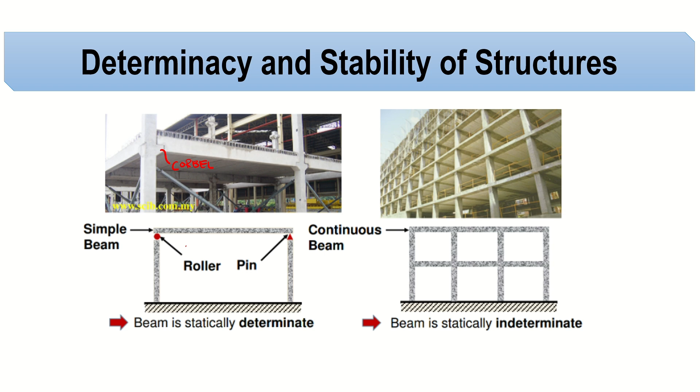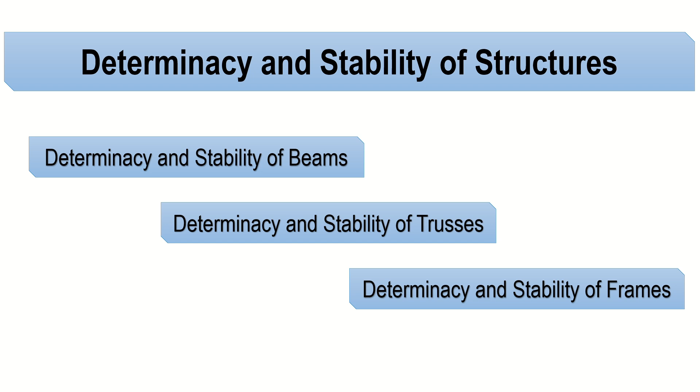Okay, so now determinacy and stability of structure can be divided into 3: determinacy and stability of beams, of trusses, and finally of frames. Each of them should contain different formulas, but the concept remains the same - the unknowns must be equivalent to the equations that you can generate.

Okay, so now before we start, let's review some of the concepts or support conditions that we need to consider if we are solving for determinacy, because the support conditions are known as the unknowns.

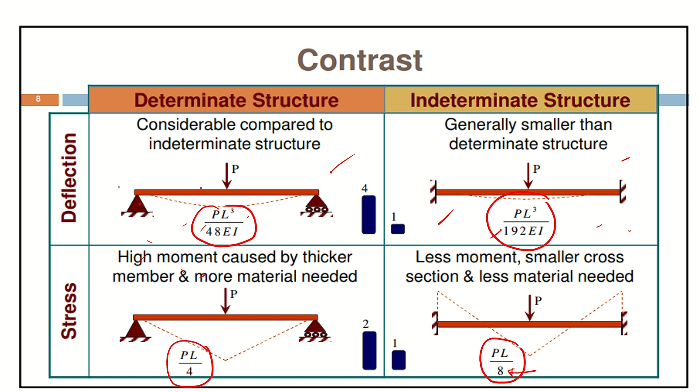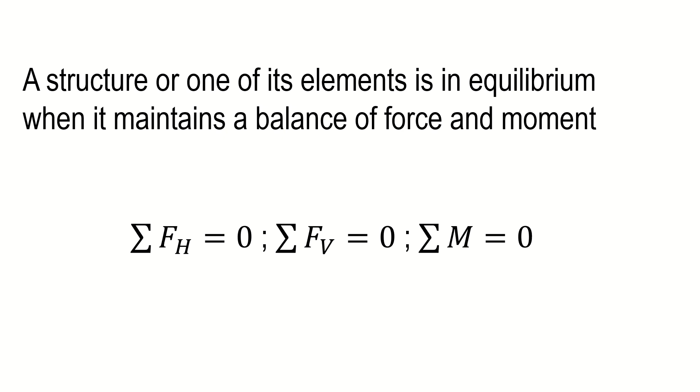A structure or one of its elements is in equilibrium when it maintains a balance of force and moment. We have 3 equations of equilibrium that can be produced for each structure. If we can solve it using those 3 equations, that is statically determinate. Determinacy: when all forces in the structure can be determined from the equilibrium equations, the structure is statically determinate. A structure having more unknown forces than available equilibrium equations is called statically indeterminate — as we discussed earlier.

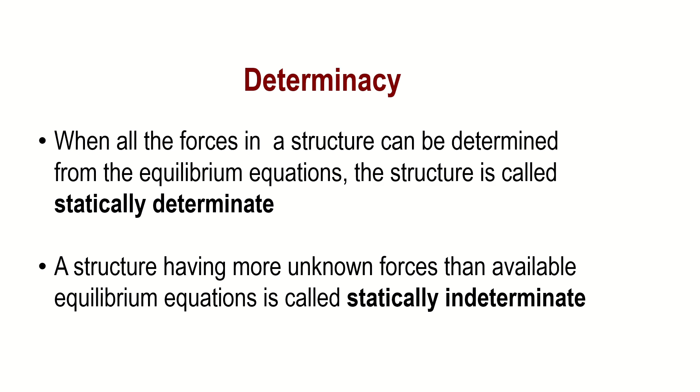Now let's check for determinacy and stability of a structure. First, count the total number of support reactions — those are your unknowns. Second, count the total number of internal forces, Fi, that can be transmitted through internal hinges and internal rollers of the structure. An internal hinge adds 2 unknowns, while an internal roller adds 1 unknown.

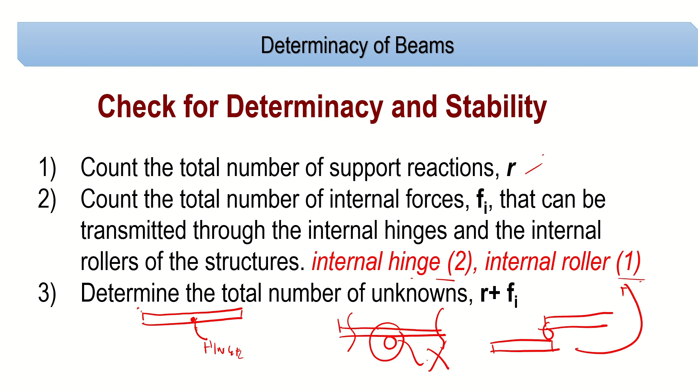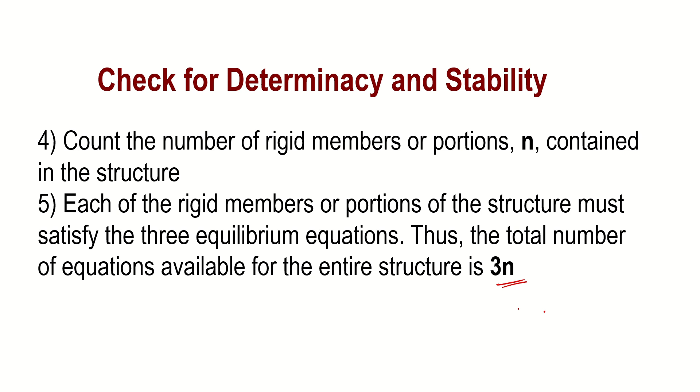Number 3: determine the total number of unknowns, which is basically the number of reactions plus the number of internal forces. After that, count the total number of rigid portions or members, N, contained in the structure. Each rigid member or portion must satisfy 3 equilibrium equations, so the total number of equations available for the entire structure is 3N — each rigid member can produce 3 equations of equilibrium. So you just multiply 3 by the number of members, N, to get the total number of equations you can generate.

Number 6: compare the total number of unknowns, R plus Fi, versus the total number of equations, 3N. If R plus Fi is less than 3N, that is unstable — meaning you can't design the structure, it will collapse. That's externally unstable; take note there's also internal instability. If R plus Fi equals 3N, the structure is determinate, meaning you can solve it using equilibrium equations alone. If R plus Fi is greater than 3N, the structure is statically indeterminate externally.

Now, when a structure is indeterminate, sometimes you're asked to find the degree of indeterminacy. How do you identify it? You simply subtract the total number of equations you can generate from the total number of unknowns — that is the degree of indeterminacy. Remember, this formula is just for beams, and this covers external stability. There's also internal stability, which we'll discuss later.

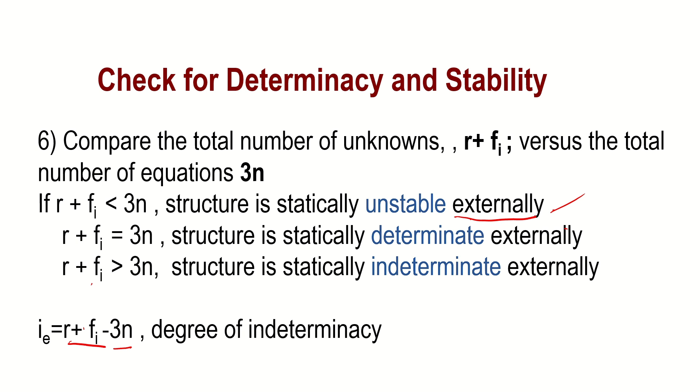As an example, we have a figure here. Determine the external stability of the structure — indicate if it is unstable, statically determinate, or statically indeterminate. If it is indeterminate, determine the degree of indeterminacy. Now, if we have a fixed support, remember we have three reactions here. This is not an internal roller — we'll come back to that, these are internal forces.

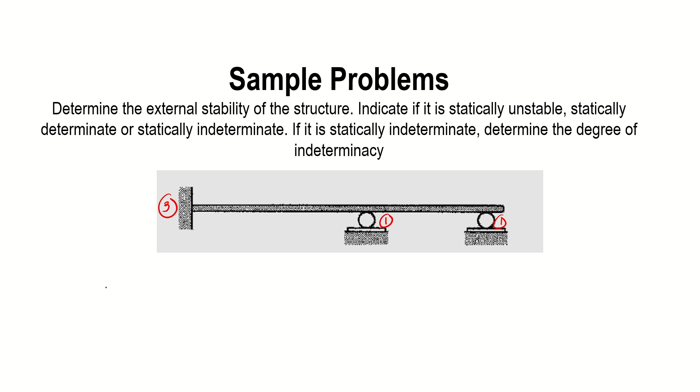Hindi po yan yun ha, roller lang yan. So kapag ganyan yung scenario, another one, kasi reaction din yan, may isang reaction. So ito, another one. So how many R do we have? Yung R natin, 3 plus 1 plus 1, that is 5. So ngayon, wala tayong Fi, so Fi natin is 0. Remember, this is not an internal roller, yung na tinutukoy dun sa unang statement natin. So ngayon, how many rigid members do we have? Isang rigid members lang naman yan, hindi na putol, so yung N natin is equals to 1.

Okay, so ano sabi natin? R plus Fi versus 3N. So yung R plus Fi natin is 5 plus 0. Ngayon yung 3N natin is 3 kasi 3 times 1 is 3. So ngayon, 5 versus 3. Mas marami yung unknown compared to the equations that you can generate. So this beam is statically indeterminate to the ilang degree. Pag ma-minusin mo lang yung unknowns versus the equations, 5 minus 3, that is statically indeterminate to the second degree.

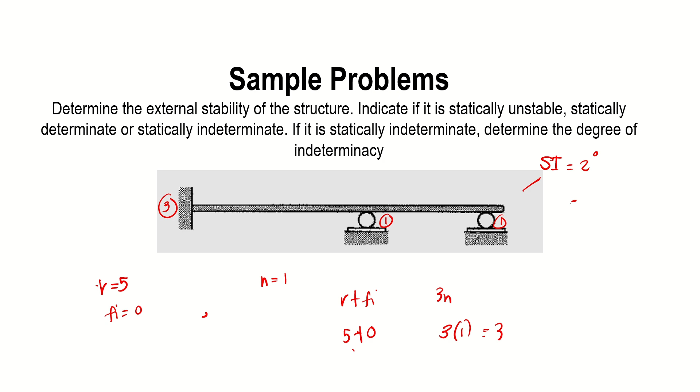Okay, so hopefully nakakasunod. Kung di nakakasunod, meron pa tayong another example here. So ngayon meron tayong fixed support and then another fixed support. Again, kapag fixed support, we have 3 reactions and then another 3 reactions here. Meron tayong internal hinge, so we have Fi na 2. So R natin should be equivalent to 6, yung Fi natin should be equivalent to 2. Ngayon, ano yung N natin? Yung N natin plus naputol sa dalawa, 1 and 2, so yung N natin should be equivalent to 2.

Okay, so ngayon, R plus Fi, that is 8. Tapos 3N, remember 3N yung kabila, so yung 3N natin that is equivalent to 6. So ngayon, that 8 is greater than 6, so this is statically indeterminate to the second degree. Again if you remember the formula, R plus Fi versus 3N. Yung N natin is 2, 3 times 2 is 6. R, 6 plus 2 is 8. So statically indeterminate to the second degree. Externally remember, externally pa lang to.

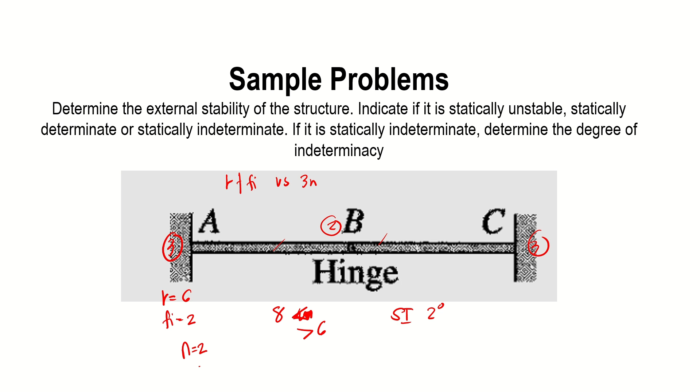Okay, so ngayon let's discuss or solve this problem. So we have an internal roller, no? Ayan, okay, so ngayon we have a fixed support, so 3 na naman dito. Yung Fi natin dito, another 1, no? Tapos ito, 1 din. So how many equations or how many unknowns do we have? Hindi ko na susulat yung R plus Fi, alam nyo na yon, so we have 5 unknowns versus equations that we can generate.

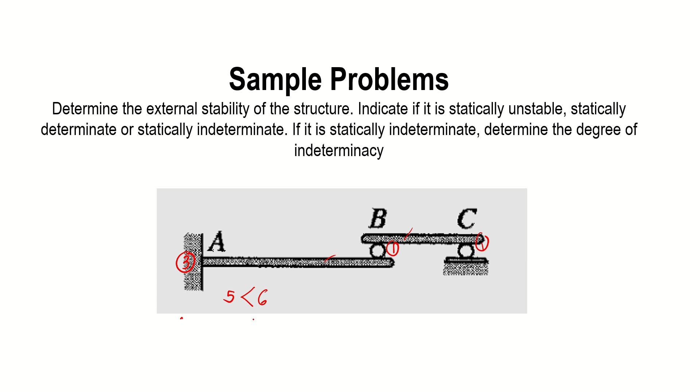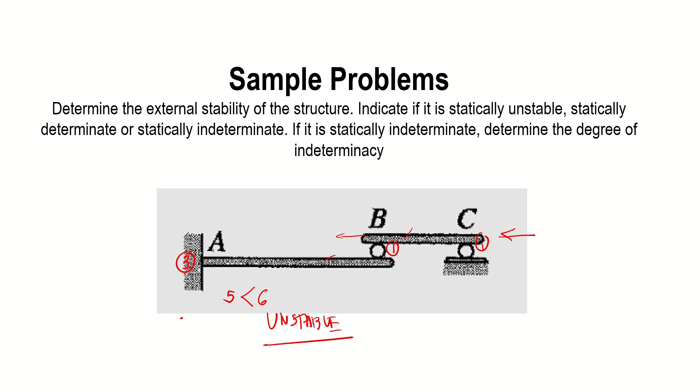How many N do we have? 1, 2, 3N, so ilan yon? 3 times 2, that is 6. So 6 is greater than 5. Since the unknowns is less than the equations that you can generate, this is automatically unstable. Kapag yung equation mas marami doon sa unknowns, unstable po yung problem. Unstable talaga siya kasi kapag naglagay ka ng loading papunta dito, gugulong yan o babagsak yan, kasi wala siyang support horizontally. Okay, so ngayon let's try to solve this problem.

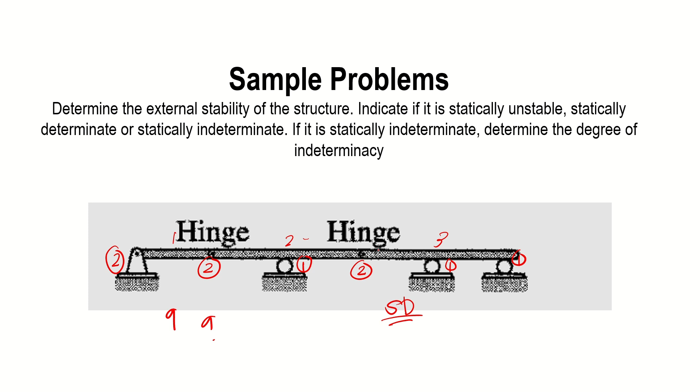So we have 2, tapos internal hinge, another 2 unknowns, plus 1, 2, another 1, another 1. Bilangin natin: 2, 4, 5, 7, 8, 9. 9 unknowns. So ilan yung equations that we can generate? 3N, how many N do we have? 1, 2, 3 segments of the beam. So 3 times 3, that is 9. So 9 versus 9, so this structure is statically determinate. Ibig sabihin, kaya mo siyang i-solve using equilibrium equation. Bakit? Each of the cut, kunyari pwede ka mag-cut sa isang hinge, kaya mo makapag-produce summation moment, summation force horizontal, summation forces vertical, kaya mo ma-solve itong problem na to using equilibrium equation.

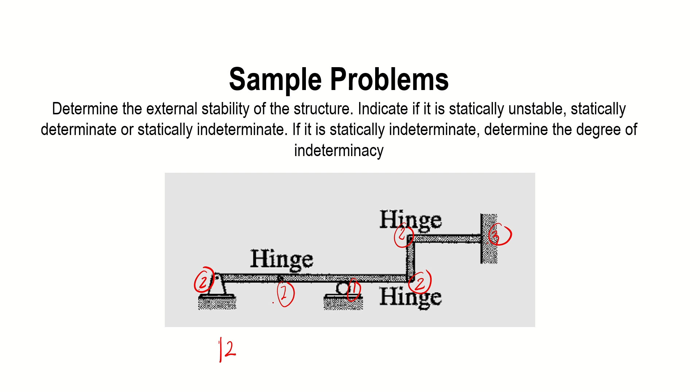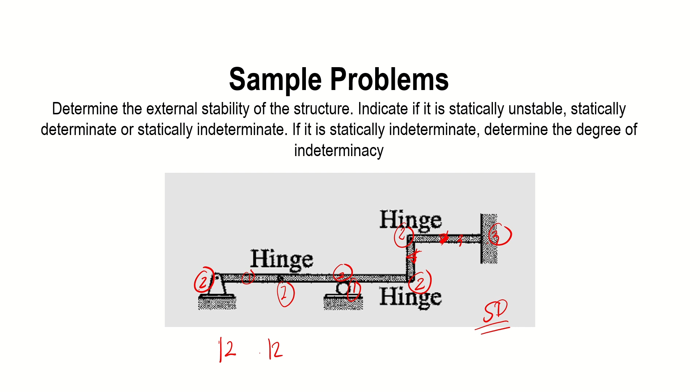So how many equations can we generate? Computein natin, bilangin natin yung number of rigid members. So we have 1, 2, 3, 4, and then, sorry, iba pala to. Burahin ko lang, isang segment lang ito. So ito ay 2, ito ay, burahin ko lang, ito ay 3. Ito ay 4. Okay, 1, 2, 3, and 4 kasi isang segment lang ito. So 4 times 3, that is also 12. So this figure is statically determinate. Okay, sayang yan sa board exam kung marunong kang mag-solve ng ganyan.

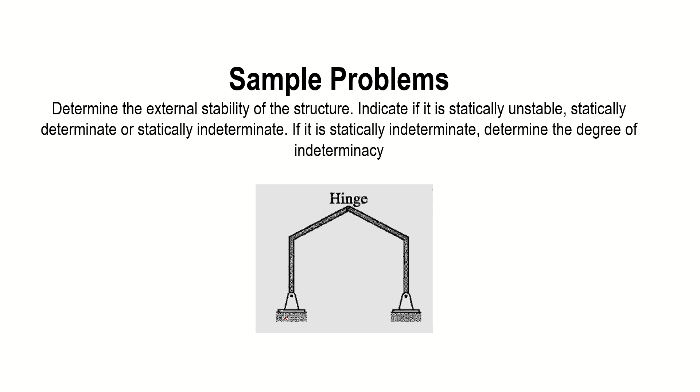Okay, another example. So we have a framing system, parang beam pa din. Try natin, so we have 2, and then another 2 kasi parehas pin. Tapos meron kang internal hinge.

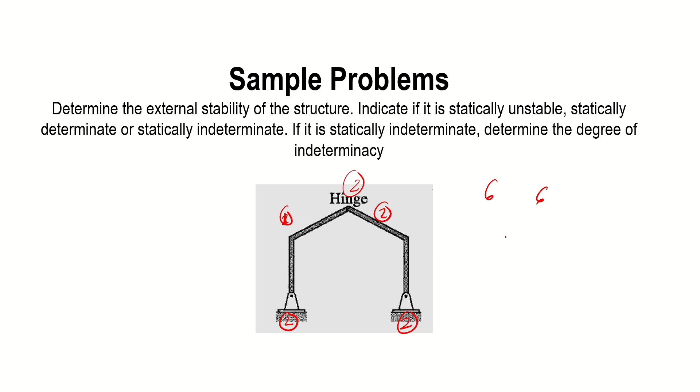So dalawa ulit. Ngayon, how many unknowns do we have? We have 6. How many equations can we generate? Count the number of rigid members. So 1 rigid member, second rigid member. We have 2 rigid members, 2 times 3, so that is 6. So this figure is also statically determinate.

Okay? So ngayon, ano naman yung internal stability? Kasi yung kanina pinag-solve natin, that is external stability pa lang. So yung internal stability is the determination if the structure is unstable or stable internally.

So if R plus Fi is less than 3n, structure is statically unstable externally. Kapag statically unstable externally, unstable na siya internally, so you don't need to analyze it further. Ngayon, if R plus Fi is equals to 3n, so sabi natin that is determinate. But also internally unstable if member reactions are concurrent or parallel, or some of the components form a collapsible mechanism. So ito yung mga statement niya para ma-determine mo yung internal stability.

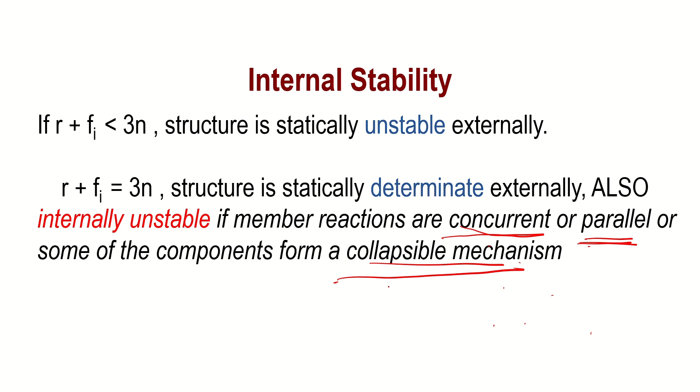Dapat daw, unstable daw siya kapag yung forces mo ay concurrent. Ano ba yung concurrent? Ibig sabihin, each of the reactions ay magtatamaan sa iisang point. Or parallel lahat ng reaction, or some of the components of the structure form a collapsible mechanism. So ano-ano nga ba yun?

So let's have an example. We have a reaction, di ba? Kapag roller, perpendicular to the surface yung reaction. So may reaction ka papunta dyan, may reaction ka papunta dito, may reaction ka papunta dito. We have 3 unknowns. How many equations can we generate? Isang rigid member lang to, so 3 times 1, 3 versus 3. This is statically determinate. But as you can see, all of the reactions ay magtatamaan sa iisang point, that is yung point O. So ibig sabihin, concurrent siya.

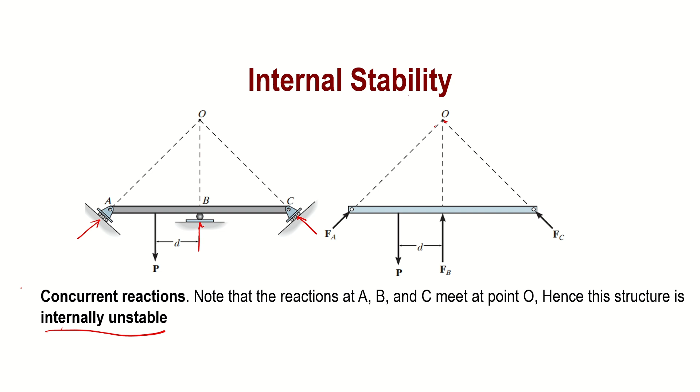Ibig sabihin, even if this is statically determinate, it is internally unstable. So ibig sabihin, hindi mo pa rin kayang i-design to kasi maaari yang mag-collapse. Concurrent reactions, note that the reaction at A, B, and C meet at point O, hence this structure is internally unstable. Concurrent forces.

Okay? So ngayon, punta naman tayo sa another form, yung parallel. So as you can see, we have another 3 rollers. Isang reaction, pangalawang reaction, pangatlong reaction. We have a total of 3 unknowns. How many equations can we generate? 1 rigid member, so again, this is statically determinate externally.

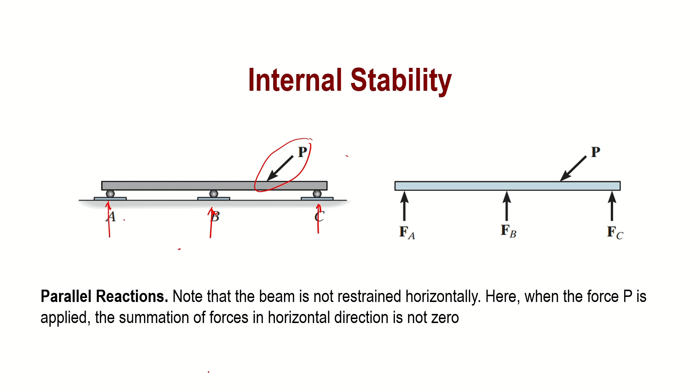But as you can see, all of the reactions, kailangan all of the reactions are parallel. Therefore, this is internally unstable. Bakit? Kasi pag naglagay ka ng load P dito, maaaring gumulong yan, kasi puro roller. Wala kang restriction horizontal. So nakalagay dito, parallel reactions, note that the beam is not restrained horizontally. Here, when the force P is applied, the summation of forces in horizontal direction is not 0. So that is internally unstable due to parallel reaction.

So ngayon, let's try to have some sample problems. Determine the external and internal stability of structure. Indicate if it is statically unstable, statically determinate, or statically indeterminate. If it is indeterminate, determine the degree of indeterminacy. So let's try to figure out.

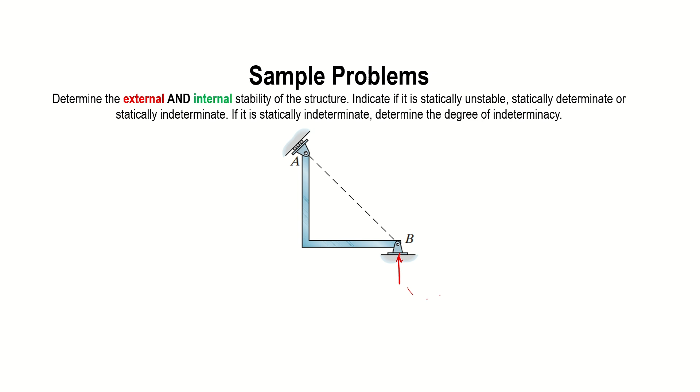So ngayon, in this figure, we have 2 reactions here, tas another reaction here. So ngayon, how many R do we have? That is 3. How many rigid members do we have? That is 1. So ngayon, yung unknown natin is 3, tapos 3 times 1. So basically, this is statically determinate externally.

So ayan, statically determinate externally. How about internally? If you take a look at the figure, as you can see, all of the reactions ay magtatamaan sa point B. So kapag nagtamaan yan sa point B, concurrent forces, so therefore that is internally unstable. So the member is internally unstable since the 3 reactions are concurrent at B.

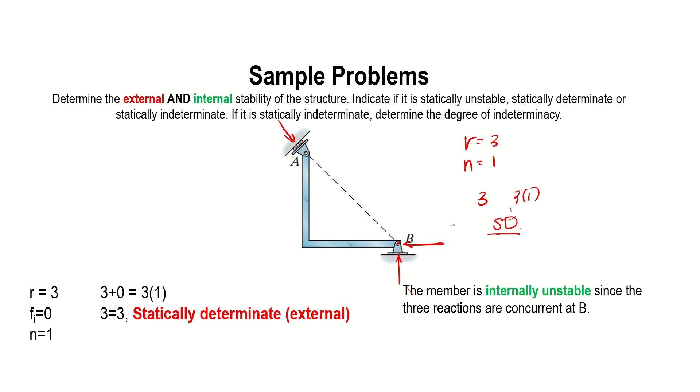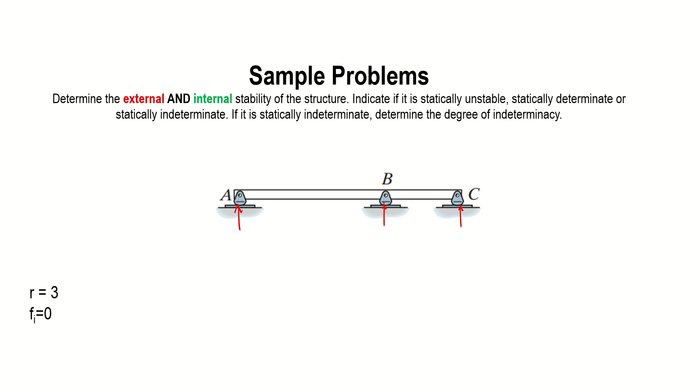Okay? So ngayon, let's have another problem. So ito, we have 3 reactions pa din. So we have 1, rocker nga pala to. Yung rocker is just like a roller, hindi po yan pin ha, baka malito kayo. Okay, Fi is 0, N is 1. So this is statically determinate externally. How about internally? The beam is internally unstable since the 3 reactions are parallel.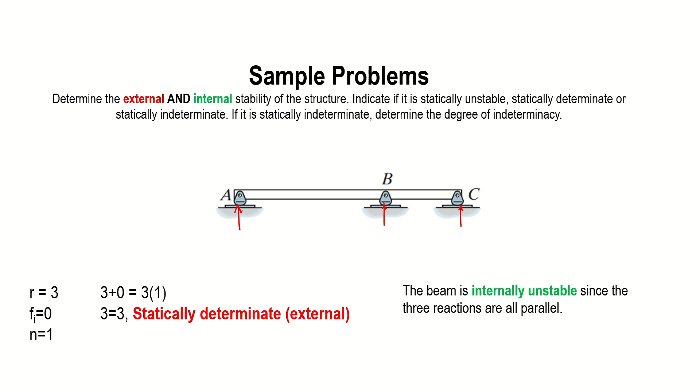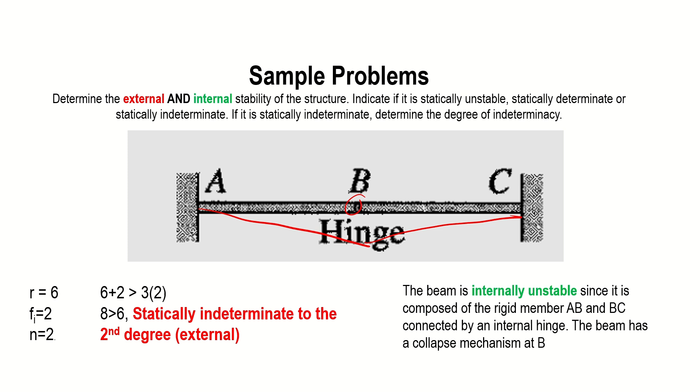Okay, now let's go to the determinacy of truss. It has a different formula but the concept remains the same. For trusses, your unknowns are not only the reactions, but also the members of the truss. So however many members your truss has, that's also your unknown, plus the reaction.

Now where does the 2J come from? Remember in statics, each joint can produce 2 equations of equilibrium: summation of forces X, and summation of forces Y. You can't do summation of moment in method of joints, so that's all you can produce.

So if the unknowns are less than the number of equations you can generate, that is statically unstable. If the unknowns are equal to the equations you can generate, that is statically determinate. If the unknowns are greater than the equations you can generate, that is statically indeterminate truss.

Let me repeat, it's not just the reaction that's unknown in a truss, but also the members. For example, with a single truss member, when you compute it, there's only one unknown because a truss only carries axial force, which can be either tension or compression. So there's only one unknown there.

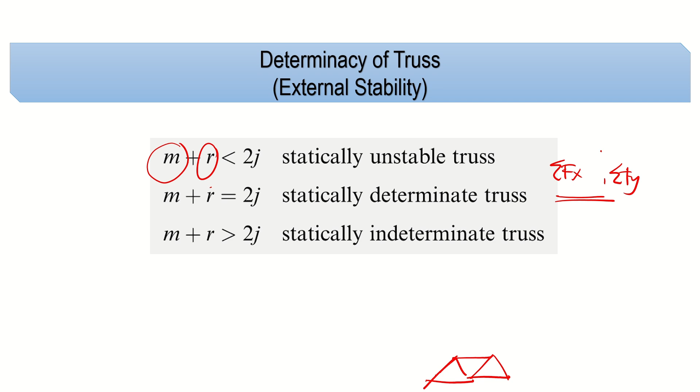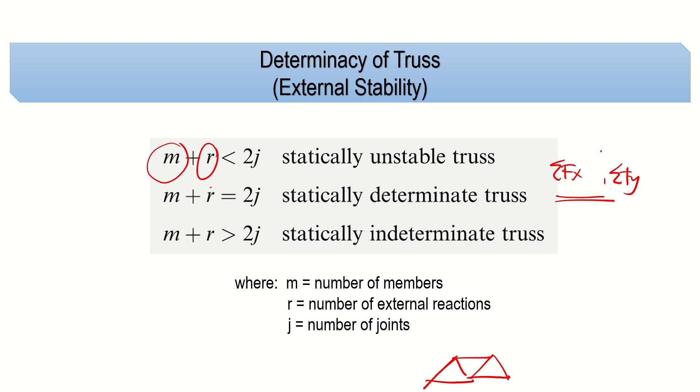Together with the reaction, that is the total number of unknowns. The total number of equations you can generate, at each joint you can do summation forces X and summation forces Y, that's why it's 2J. M is the total number of members, R is the total number of external reactions, J is the total number of joints. This is what I mean, you don't need to memorize the formula, you just need to memorize the concept.

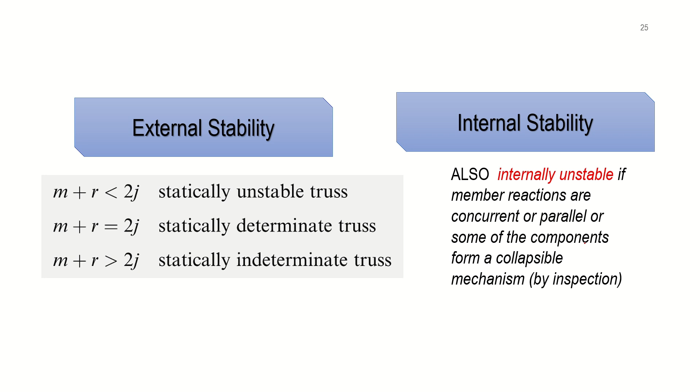Internal stability still applies the same way: if the truss forms a collapsible mechanism, or the reactions are concurrent, or the reactions are parallel, then whether it's determinate or indeterminate, it is internally unstable if one of these components is met.

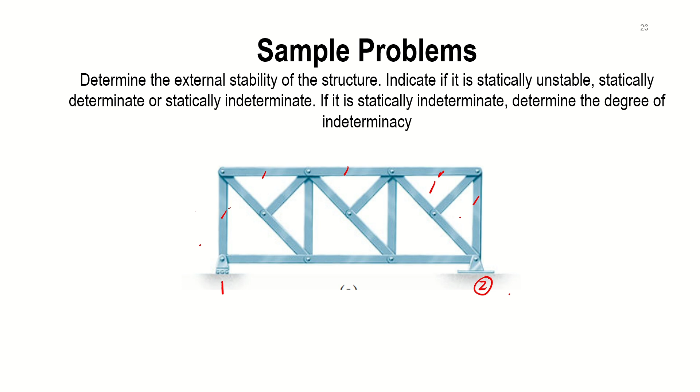Okay, let's try to solve this problem. Let's look at the internal and external stability. Again, our unknowns are the reaction plus the members. We have a roller here, so 1, and a pin here, so 2. How many members do we have? 1 through 19, so 19 members. Our M is 19, our R is 3, for a total of 22.

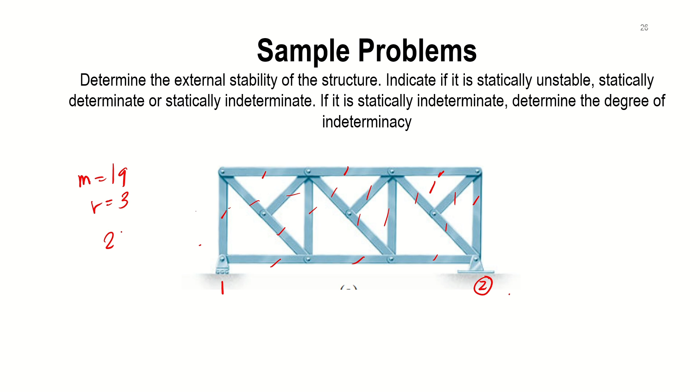22 unknowns. How many equations can we generate? 2J. Counting joints: 1 through 11. So 2 times 11, that is 22. So 22 versus 22, so definitely this truss is statically determinate externally.

How about internally? That is stable because it doesn't have concurrent forces. Not all of its forces meet at one point, nor are all its reactions parallel, and it doesn't form a collapsible mechanism. So this is statically determinate externally and stable.

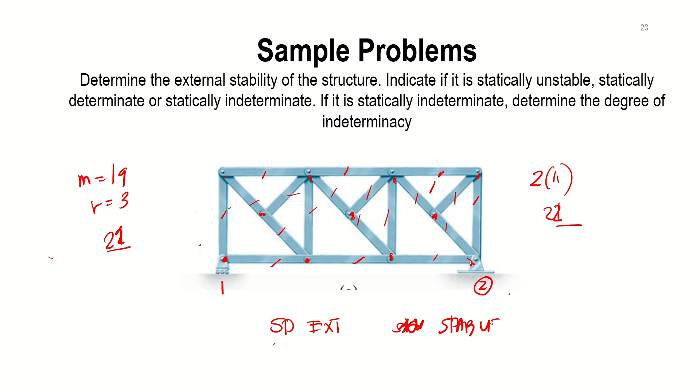Stable internally. Okay, let's have another example. We have two pins here, so two unknowns each. How many members do we have?

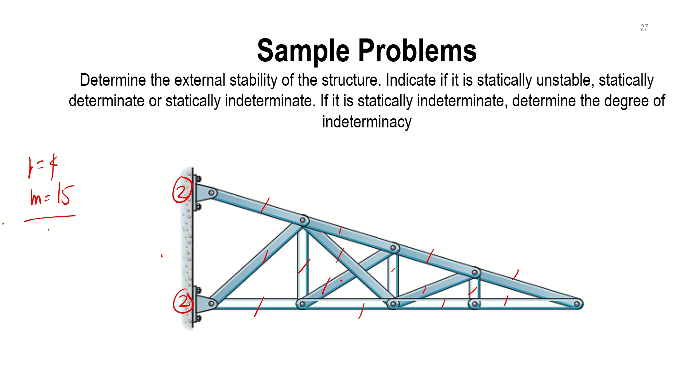So how many unknowns do we have? We have 19 unknowns. How many equations can we generate? 2J, counting joints: 1 through 9, so 9 times 2, that is 18. So our unknowns are 19, our equations are 18. This is statically indeterminate to the first degree.

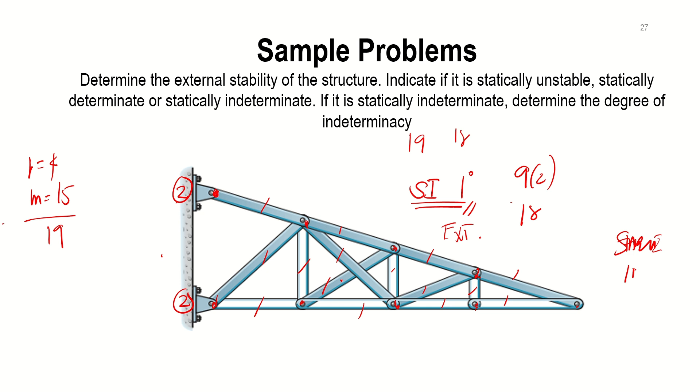So that's the external stability. How about internal? Stable internally, it will not form a collapsible mechanism.

Okay, let's try to solve this problem. How many reactions do we have? We have 2, 1. How many members do we have? Counting 1 through 11, so 11 members. Reaction is 3, so how many is that total?

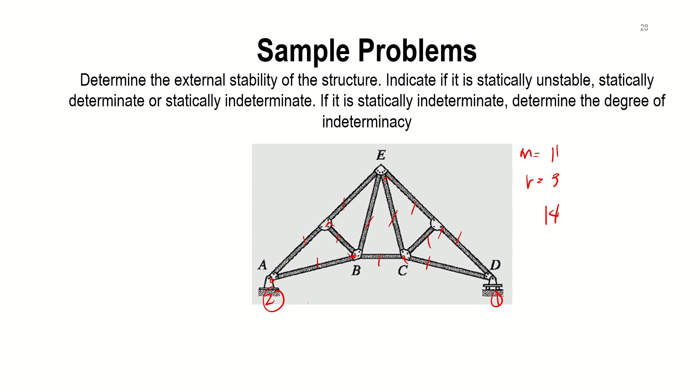14. How many joints do we have? Counting 1 through 7, so 7 times 2, 2J, that is 14. So 14 versus 14, so statically determinate externally.

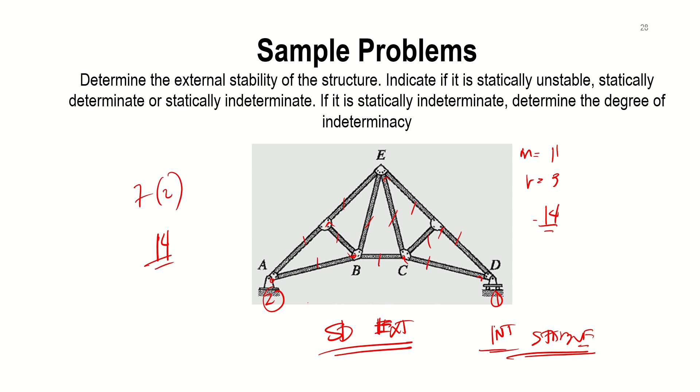So internally, it's stable. It will not form a collapsible mechanism. There's no concurrent, no parallel forces, although there are some, but not all. So it will not form a collapsible mechanism by inspection.

Okay, let's try to solve another problem. We have 2 here and 1 here. Now, how many members do we have? Counting: 1 through 13. So we have 13 members, and we have 3 reactions.

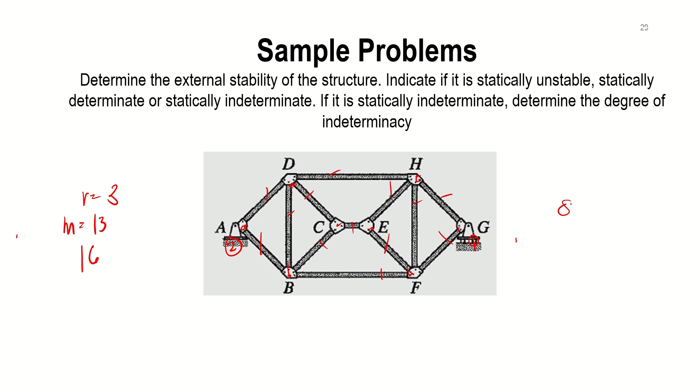So now how many unknowns is that? 16. That's correct. Now, how many joints do we have? Counting 1 through 8, so 8 times 2, that is also 16. So that is statically determinate externally.

How about internally? Internally, that is unstable. Why? Because if we place a loading here, let's say load P, it looks like it will collapse. It will bulge out like this. So it may form a collapsible mechanism. Therefore, this is internally unstable.

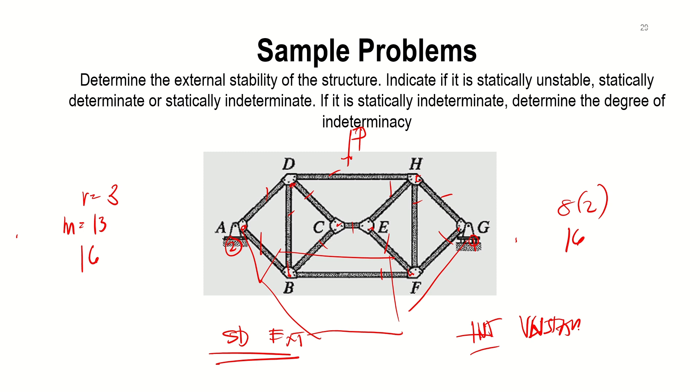So let's try to solve the determinacy of frames now. For frames, it's the same approach. Again, you don't need to memorize the formula, memorize the concept. What is the concept? The total number of unknowns must be equivalent to the total number of equations that you can generate.

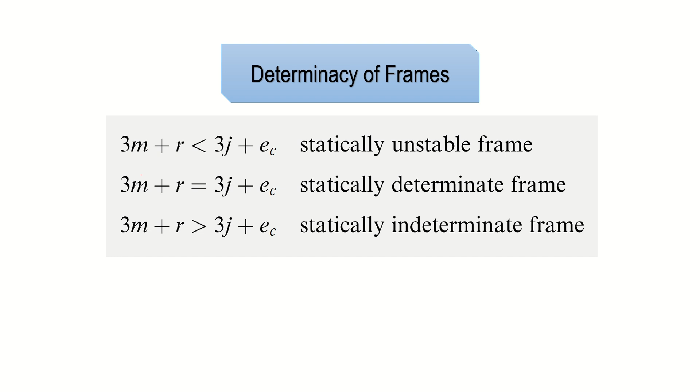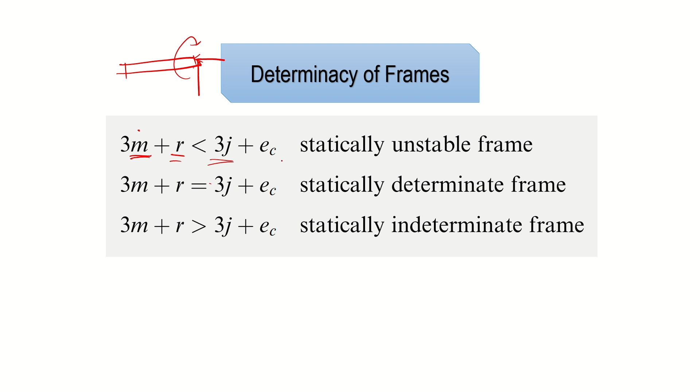Plus the reaction. Now, how many equations can we generate? Each joint of a framing system can produce 3 equations of equilibrium — not just summation of forces X, not just summation of forces Y, but together with X, summation force Y, summation moment. You can also use moment equations.

And then you will have additional equations if you have an EC. What is our EC? It's an additional equation per internal hinge. We'll discuss this later. If 4 members are connected at the internal hinge, your EC equals 3. If 3 members are connected at the internal hinge, your EC equals 2, or minus 1 only. If 2 members are connected at the internal hinge, EC equals 1.

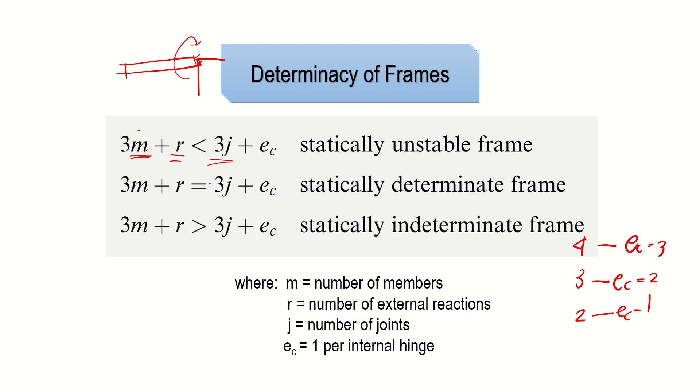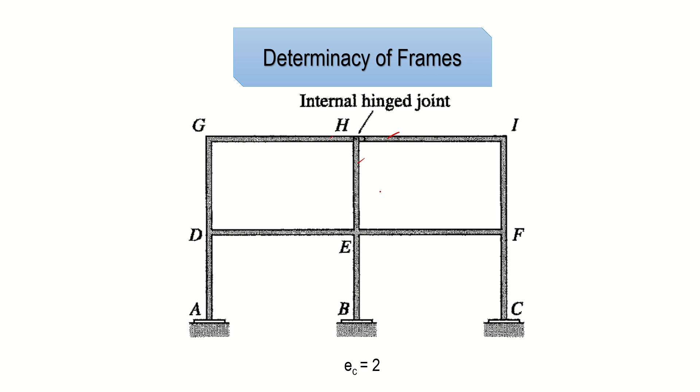Again, the total number of unknowns must be equivalent to the total number of equations you can generate. Now let's try to figure out the determinacy of frames. So how many EC do we have here? As you can see, our internal hinge is connected by 3 members. When connected by 3 members, the EC is equivalent to 2 — so that's 3, the connected members minus 1, giving you an additional equation of 2.

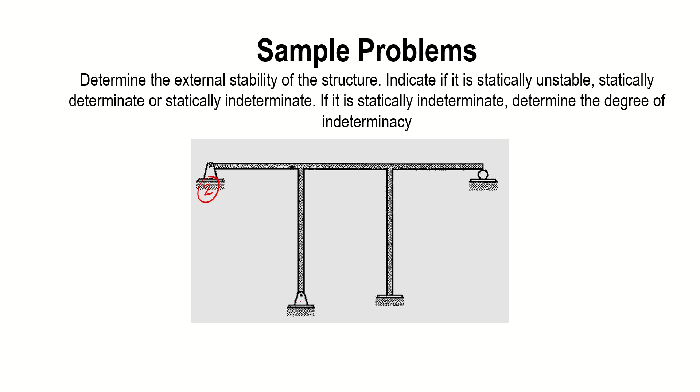Okay, let's try to solve this framing system. How many unknowns based on the reactions do we have? 2, another 2, then we have 3 here, and 1 here. Now how many members do we have? Counting: 1, 2, 3, 4, and 5.

By the way, it's not just one member like what we did in beams. In frames, each joint is considered as a joint. So this can be considered as one member.

Okay, so first let's figure out how many reactions we have. We have 2, plus 2 is 4, plus 3 is 7, plus 1 is 8. So we have R equals 8.

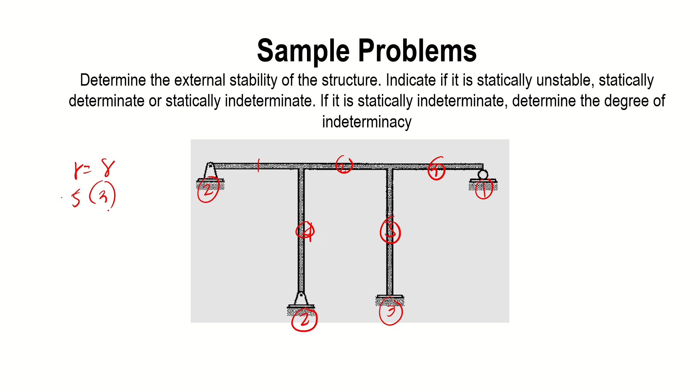How many members do we have? 5. So 5 times 3 — that's 3M, right? 5 times 3 is 15. Plus 8, so that is how many? 23. How many equations can you generate?

We have 1 through 6 joints. So 6 times 3, since each joint should contain 3 equations of equilibrium, that is 18. So 23 versus 18 — that is statically indeterminate to what degree? 23 minus 18, that is 5. So it's indeterminate to the 5th degree, externally.

And most framing systems in this class are stable internally. That's stable because automatically there are more unknowns compared to the equations you can generate. So most of the time, each framing system is stable internally.

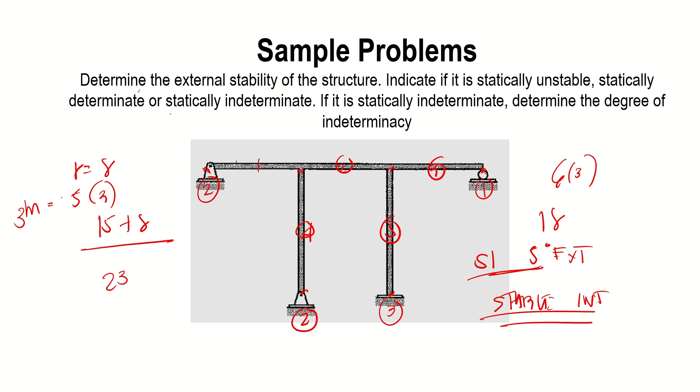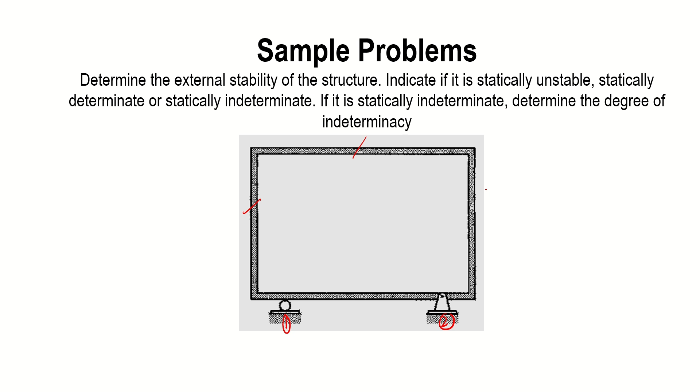Okay, let's have another problem. Now let's figure out how many reactions we have — we have 1 and then 2. How many members do we have? We have 1 through 6, so we have 6 members. So 6 members, 3 times 6, that is 18. And then another 3 based on the reaction.

Okay, so how many unknowns do we have? So we have 21. Now, how many equations can we generate? 3J: 1, 2, 3, 4, 5, and then 6. So 6 times 3, that is 18. So 21 versus 18, this is statically indeterminate to the

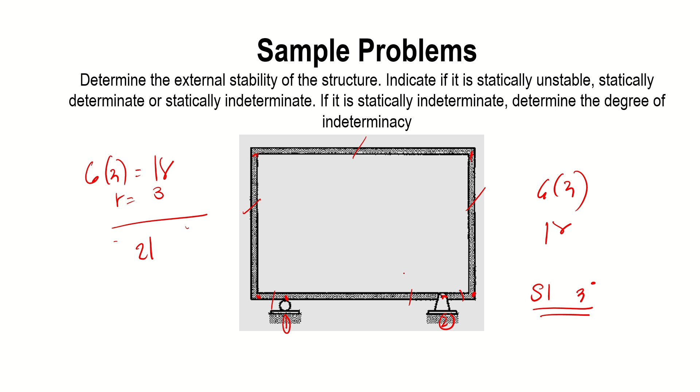3rd degree. Let's double check. So we have 1, 2, 3, 4, 5, 6 members. So that's correct - statically indeterminate to the 3rd degree. 1, 2, 3, 4, 5, 6. Okay, so again, this is stable internally.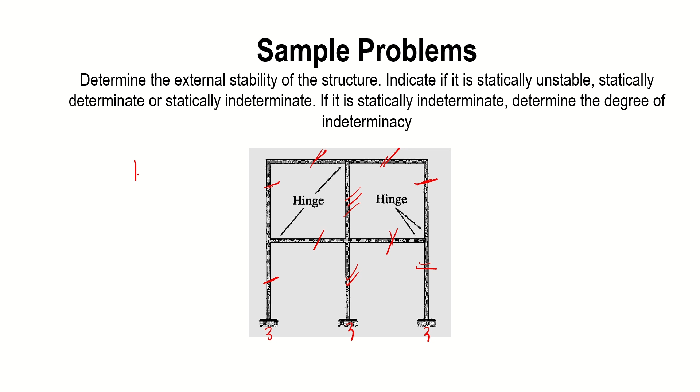22 versus 18. Okay, let's figure this out. So we have fixed support, so we have 3, 6, 9 - 9 unknowns based on the reaction. And how many members do we have? 1, 2, 3, 4, 5, 6, 7, 8, 9, 10. Sorry, let me repeat. 1, 2, 3, 4, 5, 6, 7, 8, 9, 10. So we have 10 times 3, so we have 30 plus 9 based on the reaction, that is 39.

39 number of unknowns. How many equations can we generate? Count the joints: 1, 2, 3, 4, 5, 6, 7, 8, 9. So we have 9 times 3, that is 27. But we have internal hinges. Here, two members are connected, so plus 1. Here, three members are connected, so plus 2. Here, two again, plus 1, here plus 1. So plus 1 again here, plus 1. Okay, so now, how many do we have?

So 27, let me fix this. So basically, let me erase this. Okay, so 27 plus 1 based on this internal hinge, plus 2 based on this internal hinge because three members are connected. Then here, you have 1, another 1 here. Okay, so plus 1 plus 1. So how many pluses total? Plus 5. So this is 32. So this figure is statically indeterminate to the - 7th degree, because 39 minus 32 is 7. Let me erase this. Statically indeterminate to the 7th degree. Okay?

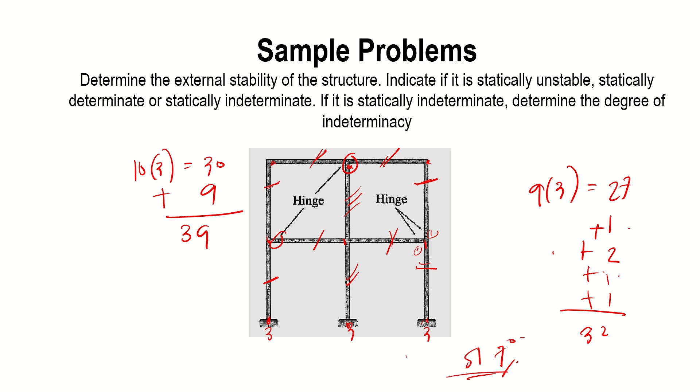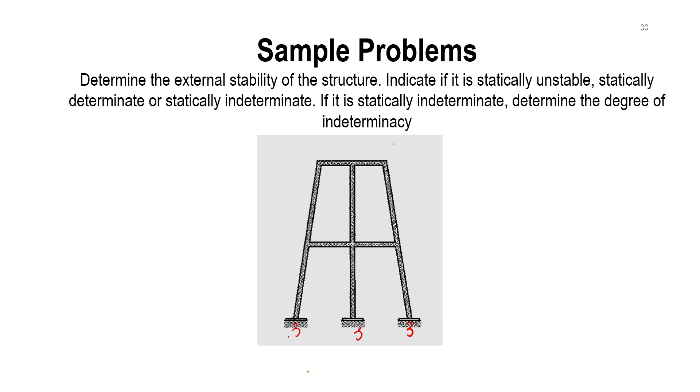So now, let's figure out this one. So how many reactions do we have? 3, 3, 3 - so 3, 6, 9. So 1, 2, 3, 4, 5, 6, 7, 8, 9, 10. So we have 10 times 3, so we have 30 plus 9, 39 unknowns. How many equations can we generate? 1, 2, 3, 4, 5, 6, 7, 8, 9. So 9 times 3J, so now this is 27.

So there's no internal hinge here. So 39 minus 27, that is 12. So this is statically indeterminate to the 12th degree. Okay?

Now, we can actually shortcut that. So we have here frames with closed loop. What does it mean when there's a closed loop? When there's a closed loop, you can cut it. So when we cut this, it will produce 3 unknowns - each cut should produce 3 unknowns. And then we can classify this segment and this segment as one rigid member, just like what we did in beams. It's just like a beam - you can cut it and consider it as a beam, as long as you produce 3 unknowns at each cut of the

beams. Okay, so when that's the scenario, let's say we're going to find the determinacy of this beam. So we cut it, it has a closed loop - one loop and a second loop, we cut it. So it will produce 3 unknowns: you have 3 here, 3 here. And then, how many rigid members do we have? 1, 2. So your unknowns total 9. Where does the 9 come from? You have a pin which gives 2, you have a roller, plus 1, so that's 3. Plus, you produced 3 unknowns based on your cutting plane. So now, your reaction or unknowns must equal 9, and your rigid members must equal 2. So that's 9 versus 2 times 3.

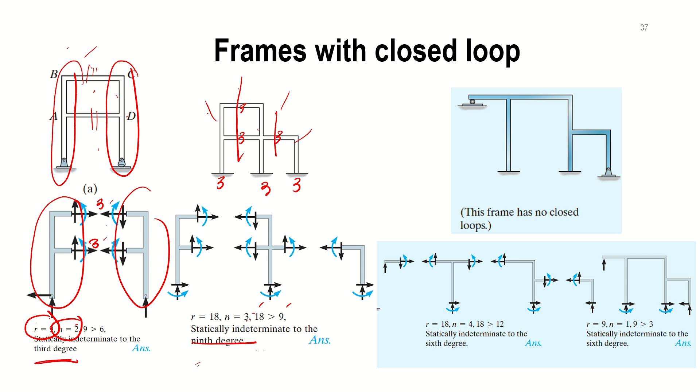So this can also be used for frames with no closed loop, as long as you're consistent with the concept. When we cut this: 1, 2, 3. So how many unknowns do we have? We have 1, three here, 2 here. So how many is that? 3, 6, 9. So 9 unknowns based on the reactions.

12, 15, 18. How many rigid members do we have? 1, hinati mo, 2, hinati mo, 3, hinati mo. So, 4 rigid members times 2, times 3. So that is 12, kasi 3n, diba?

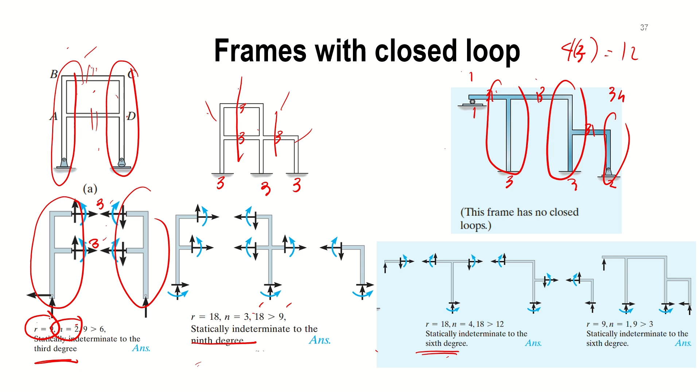So ngayon, 12 versus 18. So this is statically indeterminate to the 6th degree. So you can use this or you can use the concept or the formula provided earlier based on the determinacy of a framing system, okay?

So ngayon, paano kapag ganito yung hinahanap? Pwede mo gamitin yung concept natin kanina. Ano yung concept natin kanina? Hatiin natin. Ayan, hinati ko.

Pag sobrang dami na, ang hirap bilangin yan isa-isa. Kaya mas maganda, gamitin natin yung frame with closed loop. Closed loop naman to, so mas maganda. Okay? So ngayon, anong next na gagawin?

Computin kung how many yung unknowns based on the reaction. So 3, 6, 9, 12, 15, 15, 18, 21, 24. So 24 yung unknown based on the reaction.

Each of the cut should contain 3 unknowns. So we have 3 here, 3, 6, 9, 12, 15. So ilan to? 1, 2, 3, 4, 5, 6, 7. So 15 times 7, ilan yan? That is 105. Total mo yan, so that is 129.

129 unknowns. How many equations can we generate? Find the total number of rigid members. So we have 1, 2, 3, 4, 5, 6, 7, and then 8. So 8 times 3, kasi 3n. Ilan yan? That is 24. So 24 versus 129.

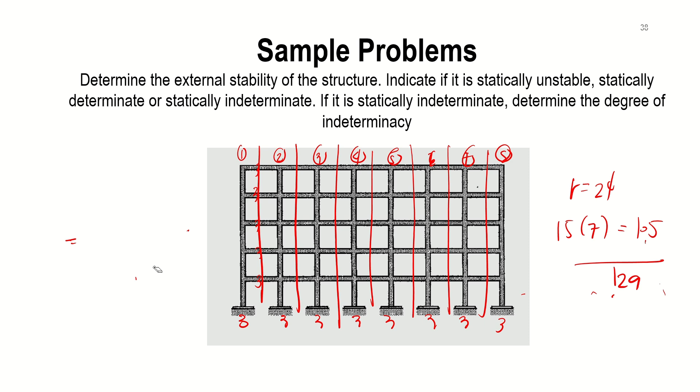So this is statically indeterminate to the 105th degree, kasi 129 minus 24, okay? So ganun lang. Actually, we have another method for this one. Buburahin ko muna lahat, tapos let's try to solve this using another method. So again, statically indeterminate siya to the 105th degree, no?

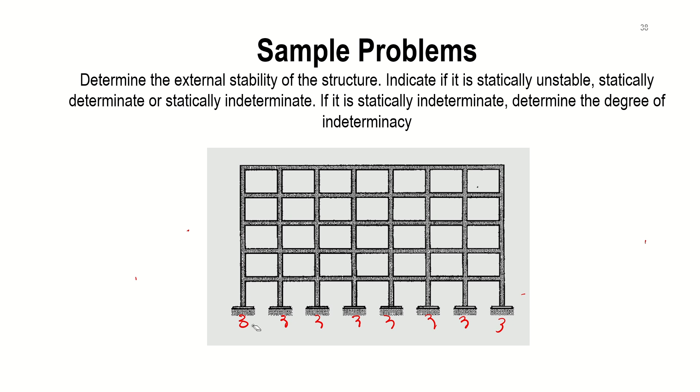Okay, yung another method na sinasabi ko is only valid if we have a closed loop, tapos lahat ng support condition mo sa baba ay puro fixed. So paano ba yun? Di ba lahat yan closed loop, tapos puro fixed yung nasa baba. Ang gagawin mo lang, bibilangin mo yung number of hook or yung loop, multiply mo sa 3.

Kasi unang tingin mo pa lang dyan, indeterminate na yan. So bilangin mo yung total number of loop, and then i-multiply mo sa 3. Yun na yung total number of degree of indeterminacy. So paano yun? Bilangin natin.

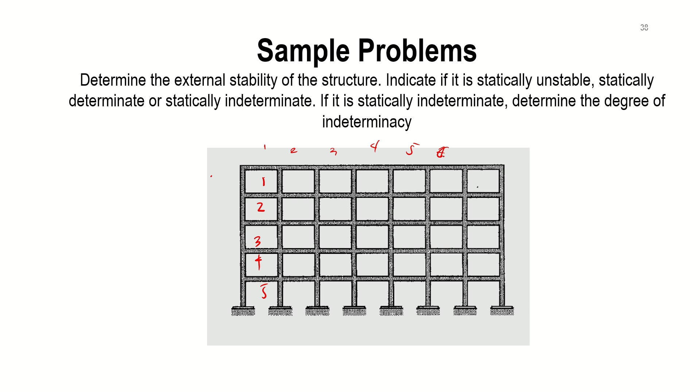So we have 1, 2, 3, 4, 5. Meron kang 5 total number of loop sa isang hilera. So ilang hilera ba to? 1, 2, 3, 4, 5, 6, 7. So 5 times 7, we have 35 number of loops.

At i-multiply mo lang sa 3, yan na yung degree of indeterminacy mo. O, try natin, multiply natin sa 3. So that is 105. O diba yan yung nakuha natin kanina? Statically indeterminate to the 105th degree. Unang tingin mo pa lang kasi, indeterminate na yan. Ngayon, bibilangin mo na lang yung loop, multiply mo sa 3, yun na yung degree of indeterminacy.

Okay? So para mapatunayan ko na gumagana ito, again this is only valid if the support condition at the bottom is fixed. Kapag pin o roller yan, di yan gagana. Para mapatunayan ko kung tama yan, let's try to solve this using this figure.

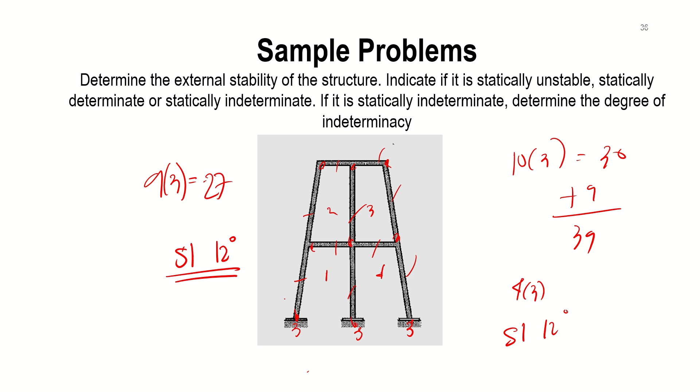So ngayon, how many loops do we have? So we have 1, 2, 3, and 4 loops. So 4 times 3, statically indeterminate to the 12th degree. O tama, diba? Ganun lang.

O mas maraming unknowns na bibilangin mo in a structure. Okay? So basically, that's it. So hopefully you do understand the determinacy.